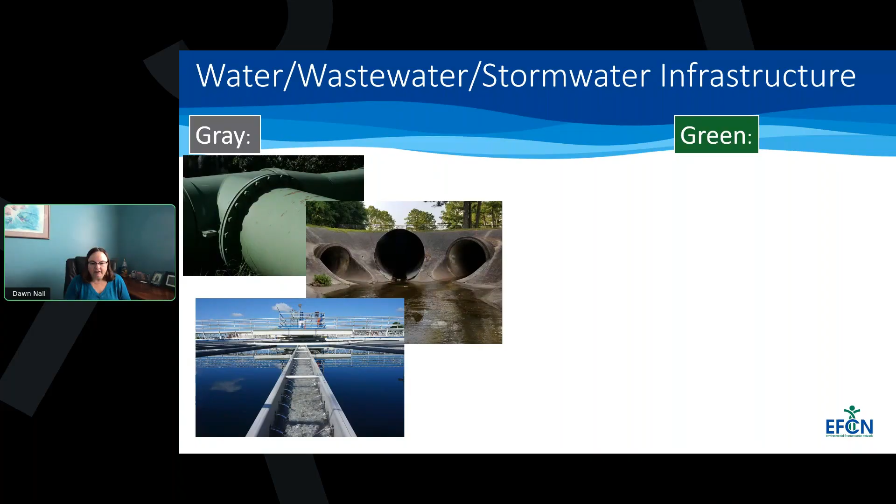With green infrastructure, we're talking about water, wastewater, and stormwater infrastructure that integrates natural systems like plant growth, the water cycle, and soil filtration as part of the function of infrastructure. So it's beyond just the bacterial and biochemical processes commonly used in wastewater treatment. That could look like a vegetated swale, a rain garden, or a wetland, whether constructed or naturally occurring.

From these pictures, it may seem like I'm creating a dichotomy, green versus gray, but actually in most cases we advocate using both systems to work together, especially if you're dealing with I&I, or combined sewers where stormwater and wastewater are combined. Green infrastructure can help control and slow the flow of rainwater, and it would be super beneficial to helping the water get back into the ground rather than flow through concrete structures all the way to your treatment plant. So we do typically encourage using both of them together.

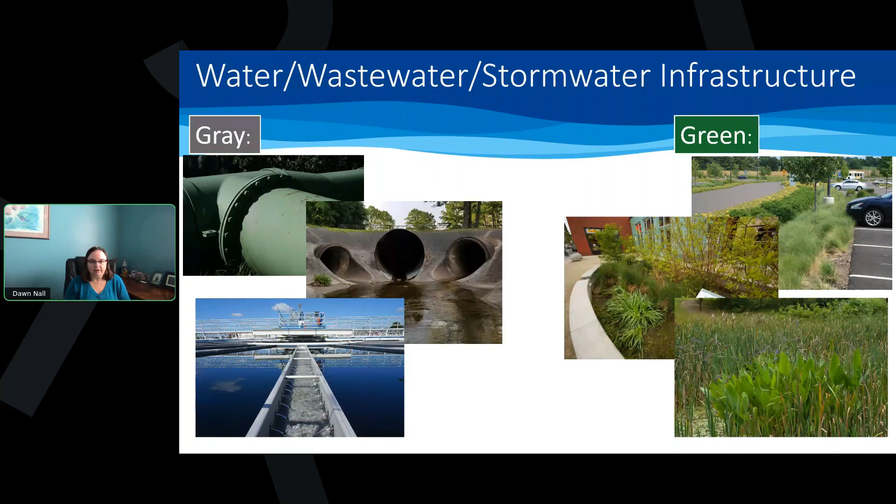Let's look at one example of green and gray infrastructure where they share a function but look different on the ground. Here we have concrete sewer pipes, and of course their function is to convey the stormwater away from the roads and the buildings.

But the green counterpart is an infiltration trench, situated along a parking lot or roadway. In addition to water flow control, it has added co-benefits: the infiltration trench allows filtration of the water through the soil, letting plants and fungi break down pollutants associated with the adjacent road—heavy metals, oils, things we don't really like to see at the treatment plant.

This is a feature that the community can enjoy walking along, with the plants cooling the air and improving air quality by capturing carbon and other airborne particles.

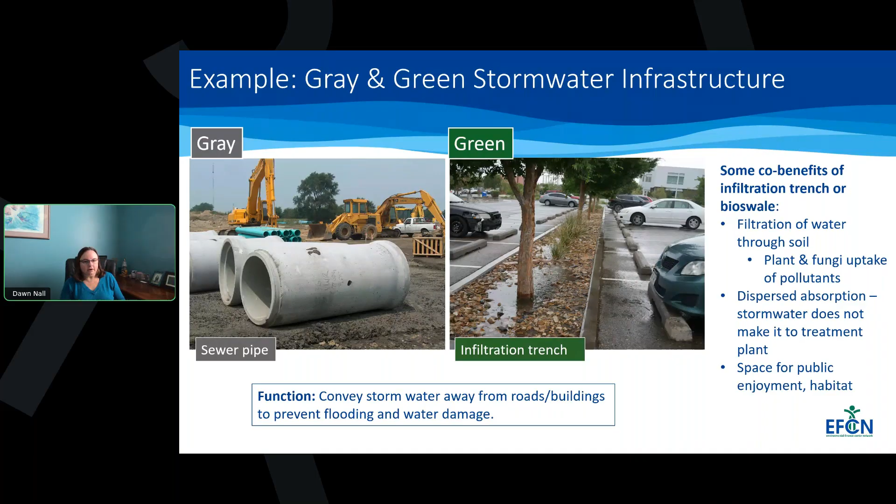If you're still feeling a little confused about what green infrastructure is and what it looks like at different scales, please watch that first webinar in the series—it gives a broad overview and a lot more examples of green infrastructure. So why are we advocating for green infrastructure or nature-based solutions?

A big reason is climate resiliency. Much of our current infrastructure was built with a very different idea of what a 100-year storm might look like than what we're seeing now. Here in New Mexico, for example, what looks like longer periods of drought followed by deluges of precipitation are far outside the historical norms for both aspects. Much of our aging storm sewer infrastructure is not built to handle the volumes of water we're seeing.

And we're losing a lot of that valuable fresh rainwater as runoff instead of being able to capture it. So green infrastructure at all scales can capture, slow, and filter stormwater where it falls. This reduces the burden on treatment plants and improves water quality by treating the water before it returns to the sources we use for drinking water, such as rivers and groundwater.

In addition to slowing and infiltrating rainwater, there's a wide range of co-benefits for both humans and wildlife alike—co-benefits that gray infrastructure just can't provide, whether it's creating habitat or other human health benefits like cleaner air, cooler environments, things like that.

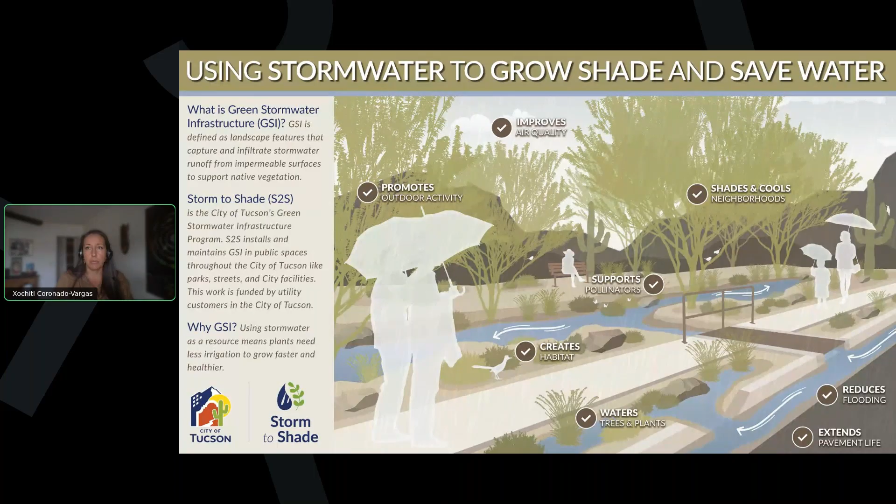The big reason Tucson is doing green stormwater infrastructure is to utilize the rainfall we have, about 11 inches a year, in a way that allows us to grow more trees, add more vegetation, and possibly cool our environment. We have a very hot environment that just keeps getting hotter. People have been doing this in Tucson for many years, even though the Storm to Shade program has only been around since 2021, fully staffed since 2021.

Site selection is determined by a few things. We utilize what's actually more specialized for Tucson that our Office of Equity created, called the Tucson Equity Tree Index. It takes into account social vulnerability factors as well as heat and existing tree canopy. We try to focus on areas with higher social vulnerability, which also tend to have lower tree canopy and have been historically disinvested.

We also focus on collaborating with existing improvement projects led by the Parks Department or the Department of Transportation, because it gives us an opportunity to add more improvement to whatever they're doing. So let's say a park is adding a splash pad and a walking path, and it's in one of our priority areas based on equity—we ask if there's opportunity to take stormwater off the parking lot and put it into an underutilized area of the park.

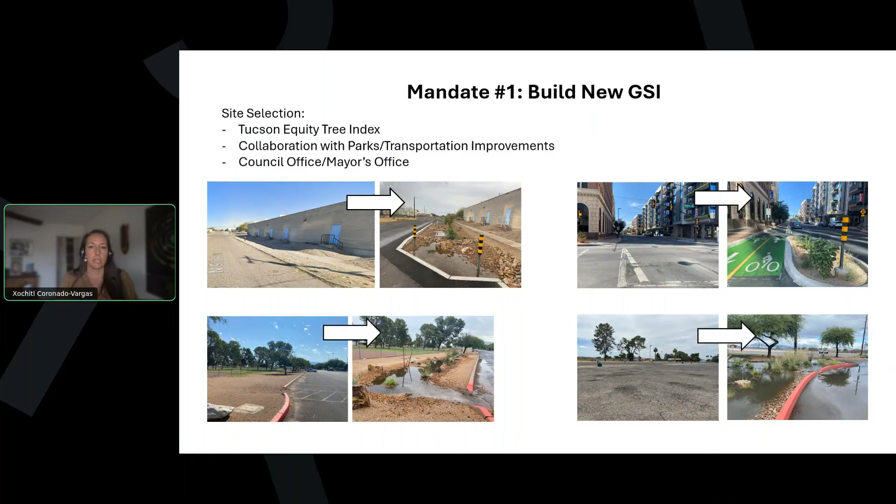The second mandate is that we maintain new and existing GSI. There was a lot of GSI built prior to the Storm to Shade program, through grants and investments the city made. It was largely requested in parts of town that tend to be more highly educated, more affluent, with people who had more connection to their government and could speak English and apply for grants and funding.

Organized communities received funding, so a lot of GSI went into those areas. Before the Storm to Shade program, if you looked at a map of where GSI existed in Tucson, you could really see the disparity—areas with higher social vulnerability had less or no GSI, while more affluent parts of town had a lot more GSI.

So for 25 years, 20 years before the Storm to Shade program, the city has been getting these types of investments. But what happens is they become a burden to the community when people become older and are unable to care for the structures, or they move out, and whoever requested it or applied for the grant no longer lives in the area.

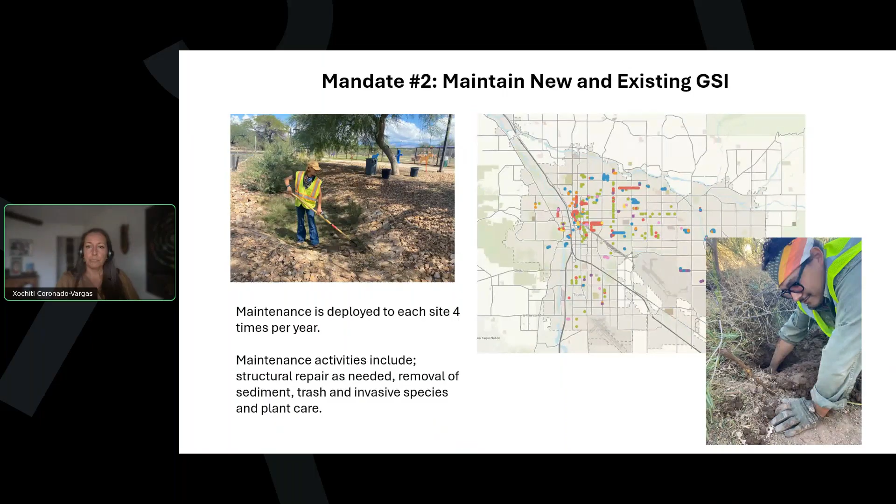And so one of the things when Storm to Shade was created was we have to maintain everything that is existing out there so that it's working properly. Each site gets a visit 4 times a year, and that includes structural repair, removal of sediment, trash and invasive species removal, and plant care. And now people love GSI, and most people want it in their community.

Today I'm going to talk about a case study. This is just one project, but it is our most expensive, most highly visible project that we've had as a program. It is along a very busy commercial stretch of road called South 12th Avenue, on Tucson's south side. It's a very high priority area for us because it has high social vulnerability and really low tree equity.

It is a corridor of a lot of Latino-owned businesses, and a lot of the businesses rent their space there. So it's a lot of businesses that are owned by Latinos, but maybe the buildings that they're renting are owned by people that are out of town.

This particular area is the heart of Tucson's culinary culture, and it's a key area for its designation as the first UNESCO city of gastronomy in the US. It's known for authentic and diverse Mexican food, but it's also known to the local community for so many things. You can go to South 12th Avenue, this 1 mile stretch, and get your tires changed, go to the meat market, get your hair cut, go to the barber shop, do folklorico dancing. There are just so many different types of businesses along this stretch that it's really a one-stop shop for anybody.

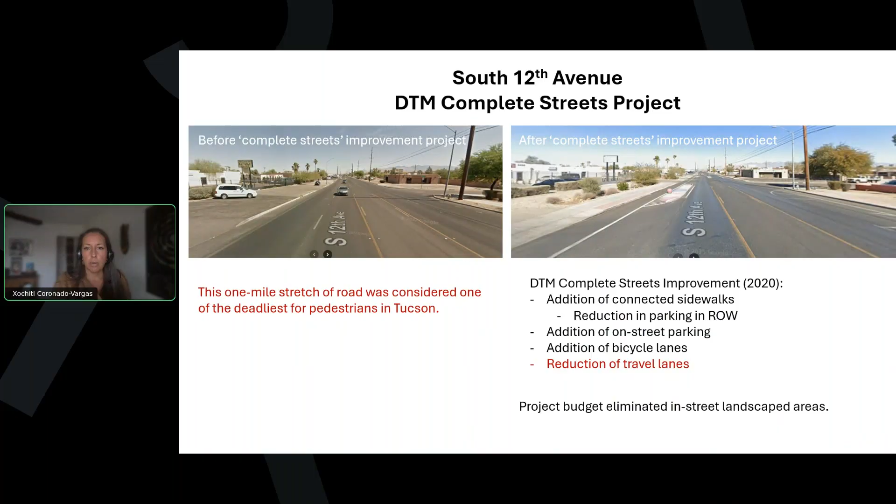This all happened in 2020. Storm to Shade became a program in 2021, and right away we were tapped and told by elected officials that we really wanted to deliver the promises made by the Department of Transportation and Mobility in this Complete Streets project to the public, which meant adding vegetated areas, adding more shade, adding more vegetation. Since we are a green stormwater infrastructure program, the landscape would be water-capturing landscape.

Initially, we thought the same design used for the Complete Streets project would easily be modified for our GSI installations. So I immediately went out and started doing outreach in 2022. What turned out to happen is there were some requirements from engineering to do potholing, some delays in design, and it took 3 years to get to our final design for the GSI components of the project.

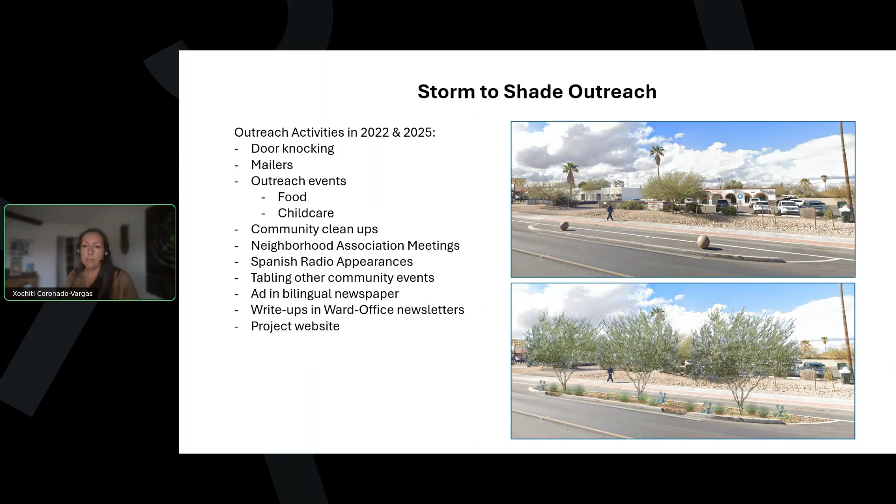But that wasn't what Storm to Shade was going to do. If the road was going to be turned back, that would have been a decision made by the mayor, elected officials, or the director of the Department of Transportation and Mobility. So I had to reiterate a lot that this was just a greening project for the area — all we were doing was taking the existing unutilized buffers in the road and turning them into green stormwater infrastructure.

So construction for the project began in September of 2025. It is due to complete in less than 2 weeks. But the first 2 months of construction were heavily barricaded. September and October, they had to do a lot of the curb work, and they had to do the demolishing of the pavement.

That meant traffic had to travel differently than what it was used to, because cars needed to be directed away from where that work was happening. And then it got moved so it could happen on the other side of the road. So what ends up happening, I'm sure everywhere when there's construction that's heavily barricaded, is that traffic starts to avoid the area. I know I avoid areas that are under construction.

And so that's what started happening here, and businesses began to feel economic effects of the construction. While only a couple of business owners showed up to any of my outreach events, all of them organized and started to reach out to the Office of Economic Initiatives.

I'm going to give a big shout out to Frankie, Francisca. She has been working with business owners on that strip for years, doing technical assistance, workshops, and all sorts of help for small businesses so that their businesses can thrive. So they started reaching out to her, not to me, even though everybody I assumed had my contact information.

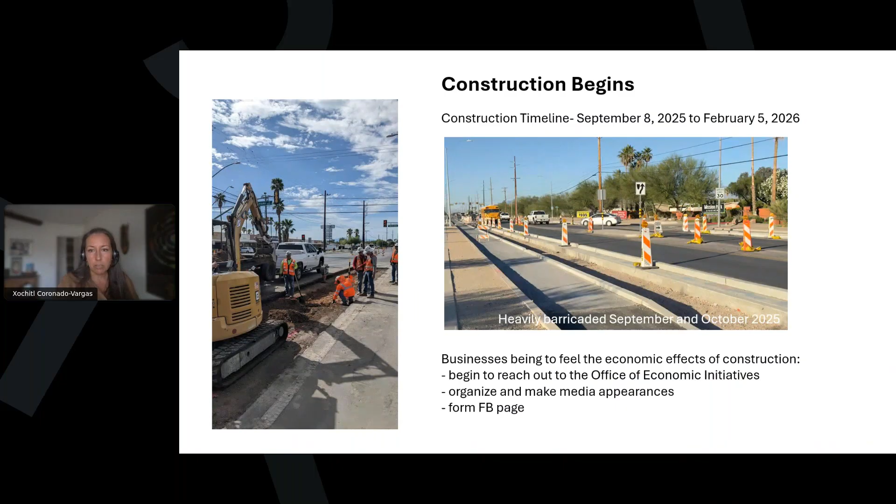So I talked to Frankie. She gave me the contact for the business owner that was kind of organizing everybody else. I started talking to him and I was like, what can we do? We want to fix this. We want to make this okay for you all.

And he said, I think people really want to be heard, and I think people are really upset and they're hurting. Can we host a meeting? So we set up a time. I worked with him to make sure we could set up a meeting during a time they could all attend, knowing that the majority of them had not attended any of my outreach events or meetings, and had not contacted me prior to the project when I had done all of the outreach.

So we held a meeting. It was attended by the staff at Storm to Shade, including my supervisor, the project manager. We had the Office of Economic Initiatives, we had the ward office from one of the wards—there's another ward that represents part of that strip, but they were having an emergency so they were unable to attend—and we had a representative from the mayor's office.

And here's what we heard: we heard how the construction had been impacting their businesses. One business owner was at risk of shutting down. He did subsequently shut down his business within about 2 months into the construction.

It was very unfortunate because there was a series of unfortunate events that happened to his business. I think it had caught fire, or was set on fire by folks who are unhoused that were camping out behind his business, and he had to shut down to do the repairs. But he ended up doing renovations and had issues with permitting, and when he reopened, the Storm to Shade project was under construction. So he had no leeway there, and his business didn't make it.

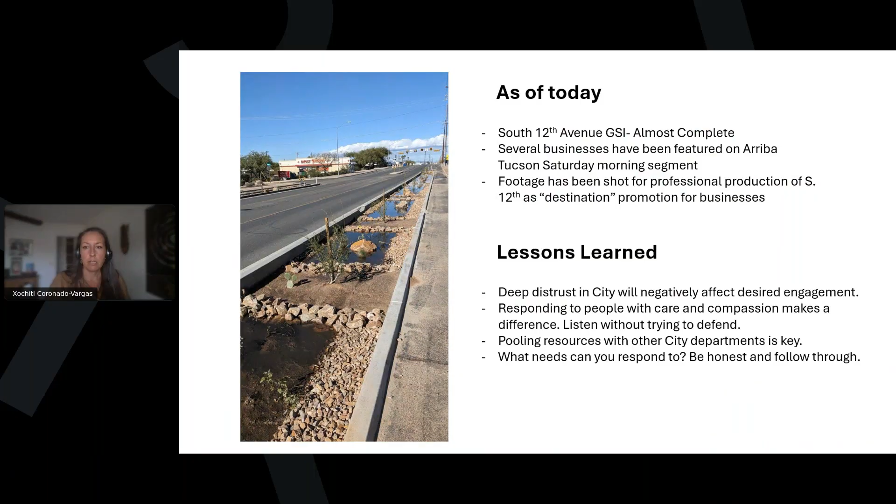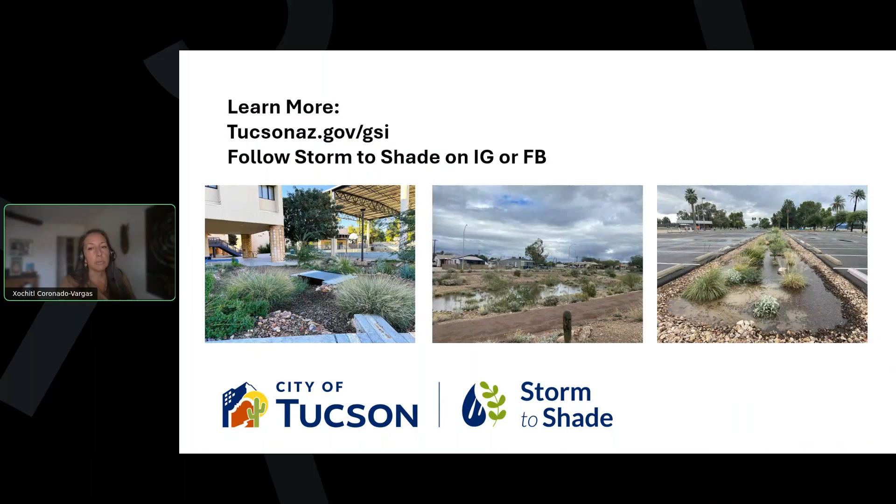Here's an example of some of the other projects that we've done. Our website is tucsonaz.gov/GSI, you can see all of our projects there. We also have a presence on Instagram and Facebook, so feel free to look us up and follow us. That's all I have.

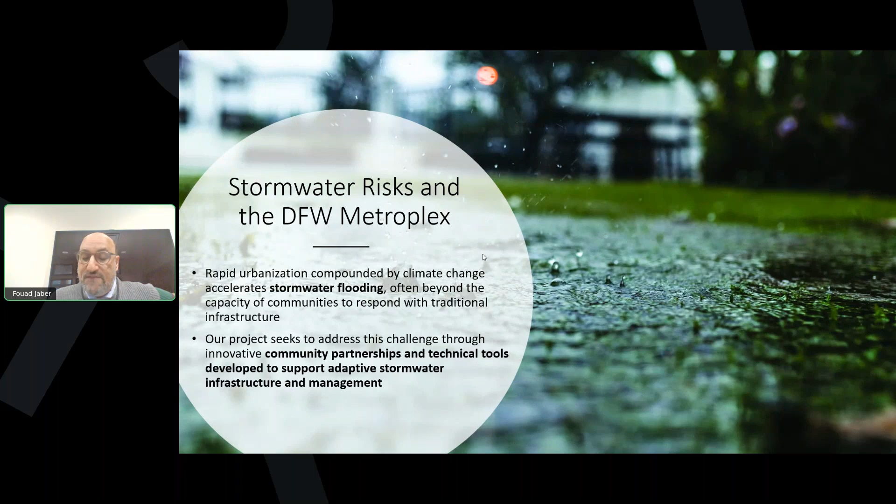Traditional gray infrastructure that Don talked about is very difficult to adapt quickly, and so green infrastructure is a great solution that can be much more easily changed to accommodate changes resulting from urbanization or climate change. One important thing that is needed is community involvement in these projects.

So again, we have rain gardens, bioretention areas, rainwater harvesting, and permeable pavement. All these are practices that increase infiltration and provide co-benefits like pollutant treatment, biodiversity, and heat island mitigation as a result.

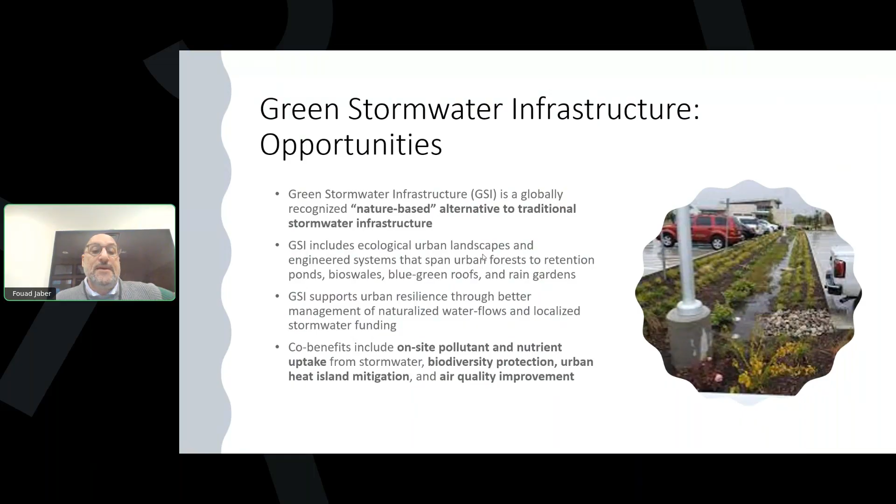Some of the challenges that have been seen with green stormwater infrastructure are lack of funding, lack of understanding, maintenance, and also equity. A lot of green stormwater infrastructure usually goes into richer neighborhoods, and it's harder to get it involved and integrated in poorer neighborhoods sometimes.

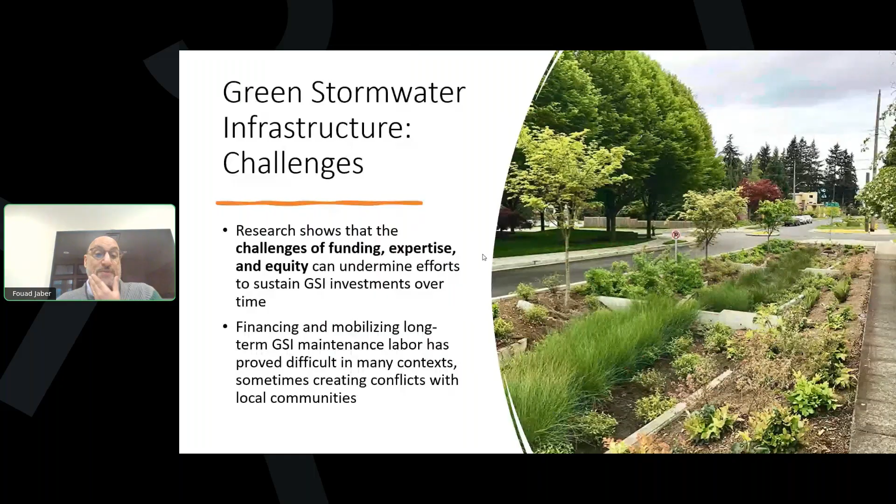We just heard the whole introduction lecture that addresses such problems. So the idea of this project is how can we make sure that the residents have ownership of that green stormwater infrastructure. So we based our idea on a common approach that cities have for their assets.

For their gray assets, these culverts, it's called asset management. And asset management, I'm going to talk about this in a couple of minutes, is basically just an inventory and checking on the condition of your assets, and then planning for financing these assets long term.

This is very common with gray infrastructure, but Don and I worked on a project where we started developing a green asset approach, mainly integrating these green assets, these green stormwater infrastructure, in the same framework that you treat culverts and other gray infrastructure. The Southwest Environmental Finance Center has a great resource for gray and green infrastructure integration for asset management.

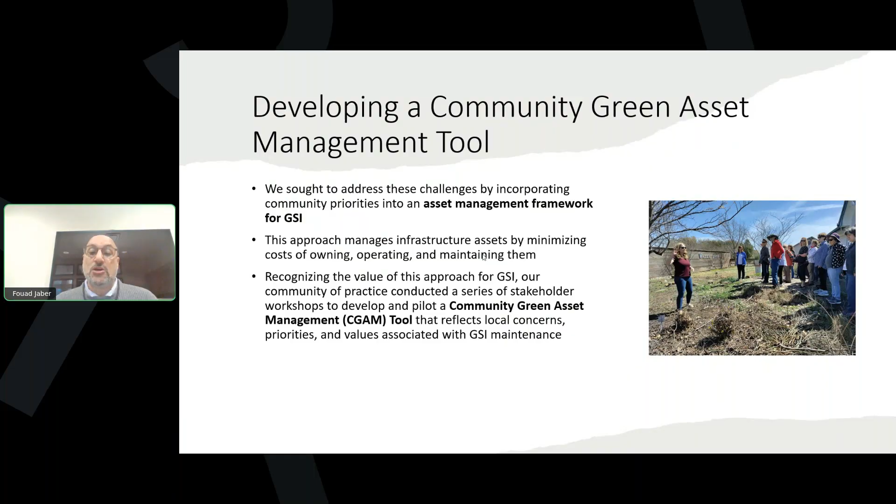We took this project a step further, where we're doing a community green asset management approach and tool, where in addition to professionals evaluating the condition and criticality of different green assets, we are trying to see it from a community angle. What does a resident want to see in the rain garden, in the bioretention close to his house, and how can he give feedback on the condition of the system that will impact maintenance and continuous funding?

So here's the framework of asset management. Basically it's a 5-step framework where the first thing you do is assess the condition of your different assets. Do they look good? Are they broken? Are they working like they're supposed to do?

Step 2 is your level of service. What is it serving, and how is it working in general? Step 3 is how critical is that asset?

For example, with gray infrastructure, if you have a culvert that takes water from a very large, high-density residential area, and that culvert is clogged, then you have a big problem, so it's very highly critical. While if it's another culvert that just empties an empty field, it falls down in criticality.

Combining this criticality and the condition of your assets allows you to create a prioritization layer. So what is the most critical and in worst condition asset, until you get to one that is functioning and is not very critical and needs just regular maintenance.

That allows you to assess the cost of fixing these systems over their life cycle. Then you can go back to your city council, and they can start planning to have funding for the maintenance and replacement of these assets on their budget for the long term. So that's what they do with typical gray assets.

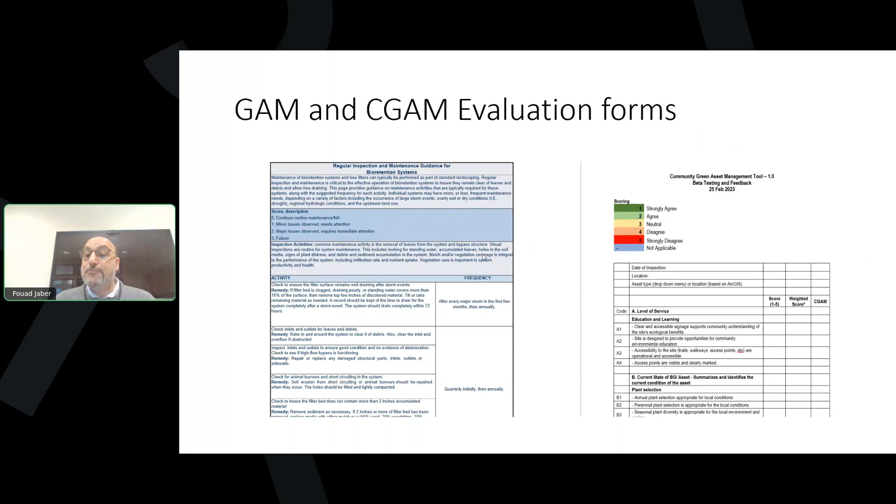Are there enough signage? Is it accessible? How are the plants, are they good? Are they appropriate to our neighborhood? Questions like that give you that system.

So in order to do this system, we actually had two steps. The first step was we had a community science working group, and these are all experts that work. The director of the Southwest Environmental Finance Center was on our community science working group.

We had members of the Nature Conservancy, the Trust for Public Land, professors from different areas, and a representative from the city of Denton that we met with monthly, and they guided our work. What do we need to do? What do we need to work on? We shared with them our plans, and they got back to us with recommendations on how to do these.

They helped us organize several workshops, 3 or 4, for the local stakeholders, in which we started with a form that we developed with a few questions, and had these local stakeholders go to actual green stormwater infrastructure systems and try to fill these out. If they didn't understand a question, they'd give us a suggestion on what we need to change. With 3 or 4 iterations of these workshops, we ended up with the final CGAM, which is Community Green Asset Management forms that we can use for the system.

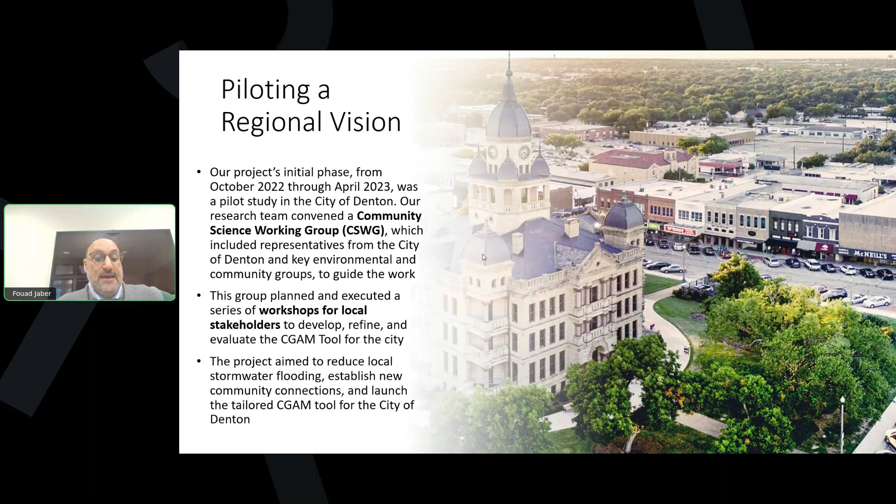This is a lot of words, but I'll talk about each of these. We had all these partners that worked with us, and the idea is that the community is now responsible. They have access to a system where they can go and grade, or score, a green infrastructure in their neighborhood. That involves: does it fit the general look of your neighborhood? Is it working correctly? Does it have that plant? Does it need any maintenance? They can report that, and it goes straight to the city as a result.

Here's the pilot project. This is Dr. Becky Bowling, who used to be with Texas A&M and is now with the University of Tennessee. She's talking with the stakeholders about what these green assets are and what people look for when assessing them.

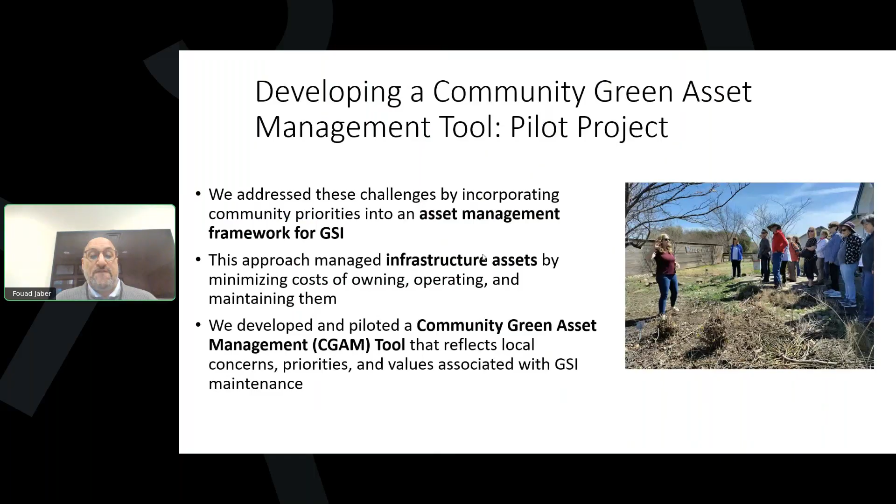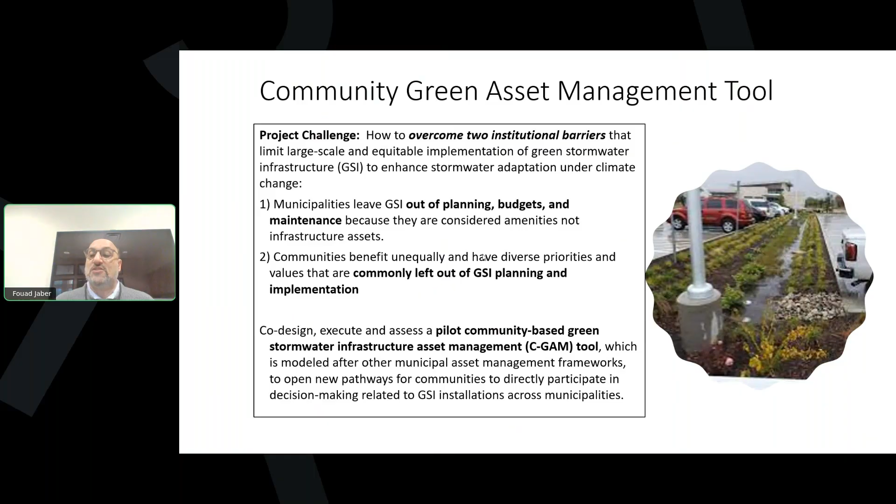From that, we developed a tool that is online. I'll go through it in a moment. That tool is currently for the city of Denton, but it can be replicated for any other area. People can go to that website, and if they see a green stormwater infrastructure practice, they can look it up - it could already be there, and they go through the CGAM tool and answer questions about it. If it's not already there, they can add it, create a page for it, mark the location on the map, note the street it's next to, and describe what it is - for example, a rain garden you guys didn't have on your website. Then they can answer the inspection form, the community inspection form that is on that system.

I'm going to show you the example - click right here. So you guys can see my website now. This is that tool, based on a story map from the ESRI ArcGIS company. There was a video that included this, but it got removed from YouTube - I'm going to talk with the organizer to change that soon.

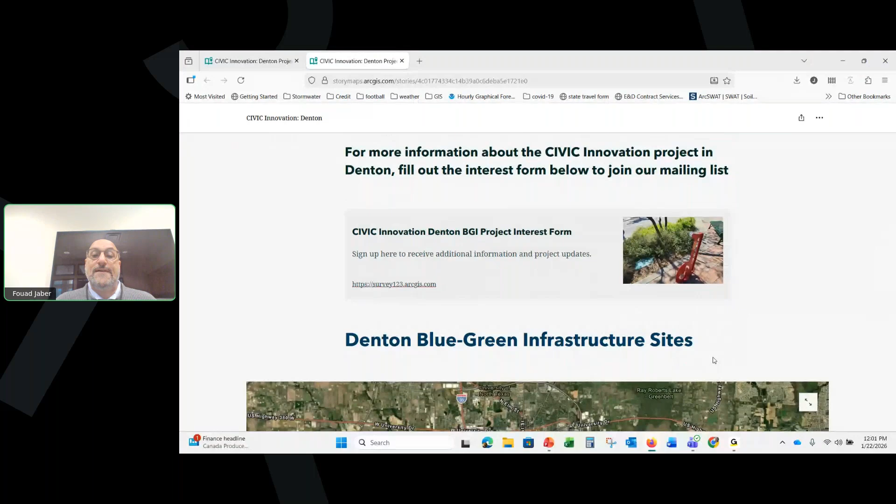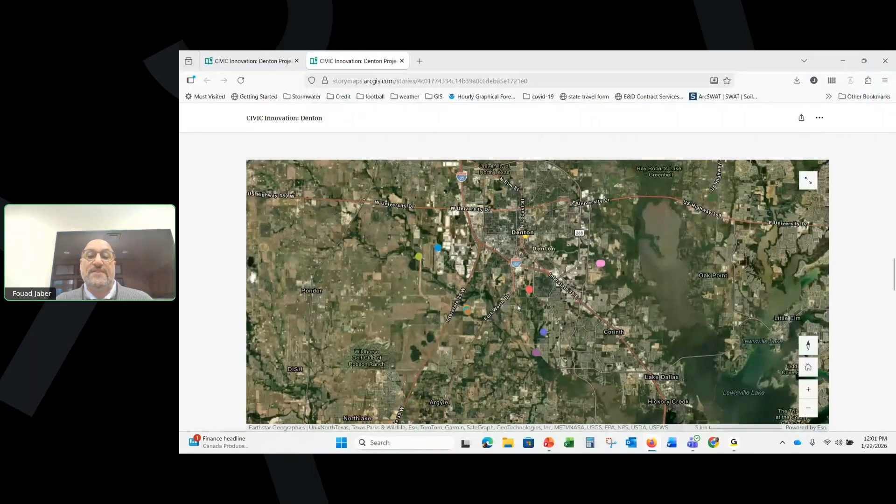It has information on it - this is the CGAM tool, I'll click on that in a second. Where was this funded from? There's a survey for people to give feedback on their idea, and a map of all the green assets in the city of Denton. You can see 1, 2, 3, 4, 5, 6, 7, 8 are in that project. There's also pictures of the different systems, another map, and a link to an infrastructure education resource library. This is intended to be a comprehensive green infrastructure information system.

What's important here is this tool tells you what to answer. First you give the date - today it's the 22nd, let's say - and the BGI site, let's say Hickory Street. Then I can go to Hickory Street and click specifically on it. Let's say I'm looking at a rain garden at this site. Now people know where it is, and then you go to next.

Now it gives you that questionnaire: does the vegetation look healthy? Strongly agree. Is there a filter material, rock, that supports the function of the site? Strongly agree. There's all kinds of questions here - the main site structure is in good condition, is there signage, are the surrounding amenities well maintained, do you have any additional comments? These are divided into categories: the first is site characteristics, the second is plant selection and maintenance of the BGI site, and there are two other pages of questionnaire.